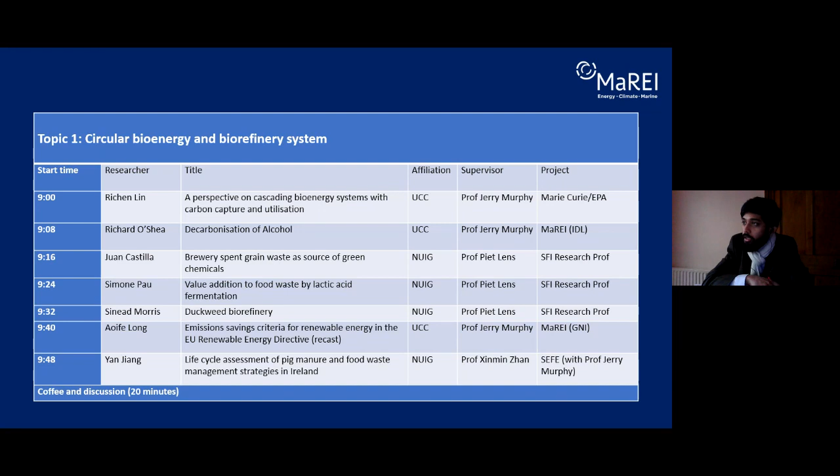Thank you, Jerry, for asking me to be the chair and giving me the opportunity to chair this first session of the MaREI Biofuel Symposium. So without any delay, I would like to start our session on circular bioenergy, and what we will do with our first presenter, Richen Lin, is look at a broader perspective on bioenergy systems, which looks at cascading bioenergy systems with carbon capture and utilization. So over to you, Richen, for your first presentation.

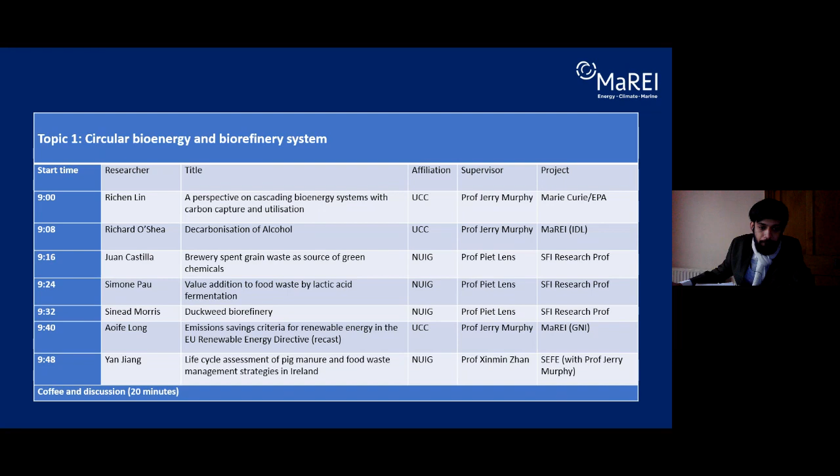Yeah, thank you very much, Archie, for your introduction. I'm very delighted here today to present my research on the cascading bioenergy system with carbon capture and utilization. So that's the topic. If you go to the next slide.

And here in this slide, it shows the opportunities of anaerobic digestion-centered carbon capture and utilization technologies, with a short term of ADCCU. There are many different technologies in the renewable energy area, such as wind and solar from the marine sector, and also power to gas for renewable hydrogen production, bioelectrochemical systems for CO2 reduction and fixation. We also have technologies, anaerobic digestion, biomethanation for biogas and biomethane production.

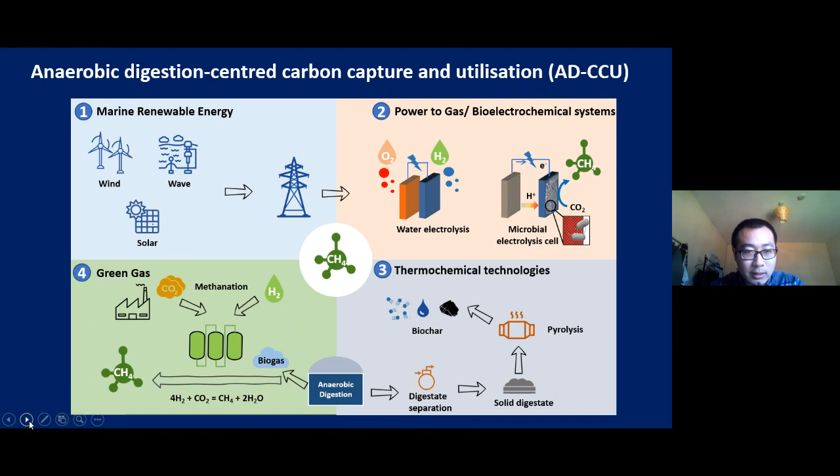There are also thermochemical technologies such as pyrolysis and gasification for the valorization of solid digestate for biochar production. And among the different technologies, anaerobic digestion offers a very compatible platform so that many other technologies can be integrated with this. However, moving on to the next slide, with so many individual technologies and options, we want to ask how these technologies can be best integrated to maximize their potential, especially in terms of the energy output and sustainability. Moving on to the next slide.

Trying to answer this question here, we propose 3 anaerobic digestion-based bioenergy systems. Up top, that's the conventional anaerobic digestion with amine scrubbing for biogas upgrading. In the middle, you can see it's the anaerobic digestion and power to gas based biomethanation. Down below is the third system, anaerobic digestion with microbial electrolysis cell for biomethanation. Systems 2 and 3 both include the pyrolysis of solid digestate for biochar production in the cascading circular concepts.

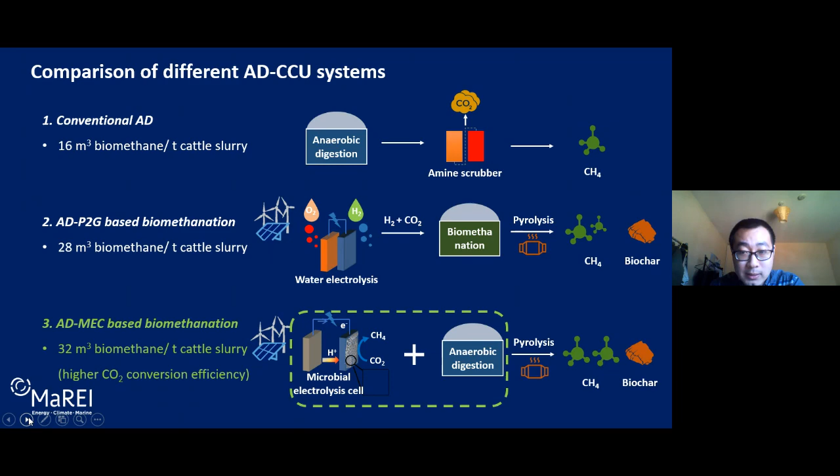So by doing the mass balance of different systems, it allows us to track the specific flow of each component from input feedstock, for example, cattle slurry, to the final products in the form of biomethane, syngas, bio-oil, and biochar. And here I didn't include the details for calculation. But what we found is that anaerobic digestion with microbial electrolysis cell has the highest biomethane yield due to the highest CO2 conversion efficiency and the highest feedstock biodegradability. And the ADMEC system almost doubles the methane yield as compared to the base case. Next slide, please.

And based on the mass balance calculation, we can then calculate the net energy yields and greenhouse gas emissions of different systems under different scenarios. And here we assess the three scenarios in terms of the energy supply to power to gas and microbial electrolysis cell. The first scenario is to use the curtailed or constrained electricity for power to gas and microbial electrolysis cell. The second scenario is to use renewable electricity, and the third scenario is to use grid electricity.

And due to the fact that each scenario has a very different primary energy factor, in other words, energy efficiency, the results are very different. For example, if using grid electricity, both power to gas and MEC cannot produce enough energy to offset the energy inputs. That is to say, the system performance depends absolutely on the source of electricity.

And the potential for greenhouse gas emission savings comes from three sources, as indicated on the right side of the slide. The first source is the biomethane production to replace diesel. The second is the avoided fugitive greenhouse gas emissions from cattle slurry if it's used as feedstock. And the third is the CO2 sequestration by biochar.

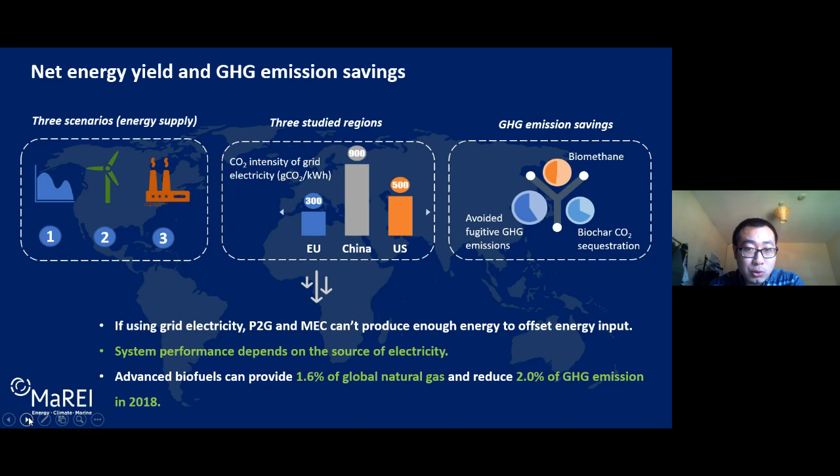In addition to the desktop study, we've also looked at experimental studies on the topic of integrating anaerobic digestion and pyrolysis with the use of biochar in digestion to promote direct interspecies electron transfer. We published a few papers on this topic, and generally we found that the optimal system can increase biomethane yield by around 20%, and it can also reduce digestate amount by a level of 25%. And we also conclude that biochar can achieve comparable performance to the high-cost nanomaterial graphene as a proof of concept material.

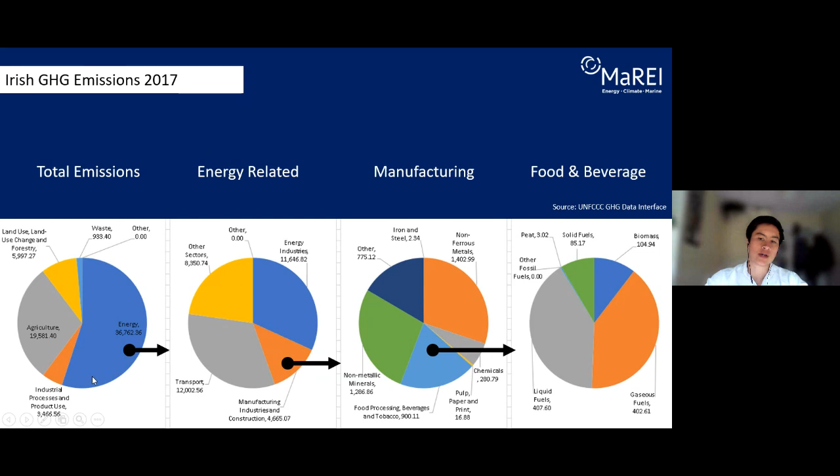So one of the ways that you can produce renewable thermal energy in the food and beverage sector is through the use of anaerobic digestion. So looking at a large distillery in Ireland, you can see that it consumes about 254 gigawatt hours of natural gas, which is a significant amount of energy.

The byproducts of whiskey production consist of draff, thick stillage, and thin stillage. These are residues of the brewing and distillation process following the processing of malted barley, unmalted barley, and maize. Currently, these byproducts are converted into animal feed, dubbed moist grains, dry distillers grains, and syrup. However, it is possible to convert these byproducts, draff, thick, and thin, into biogas.

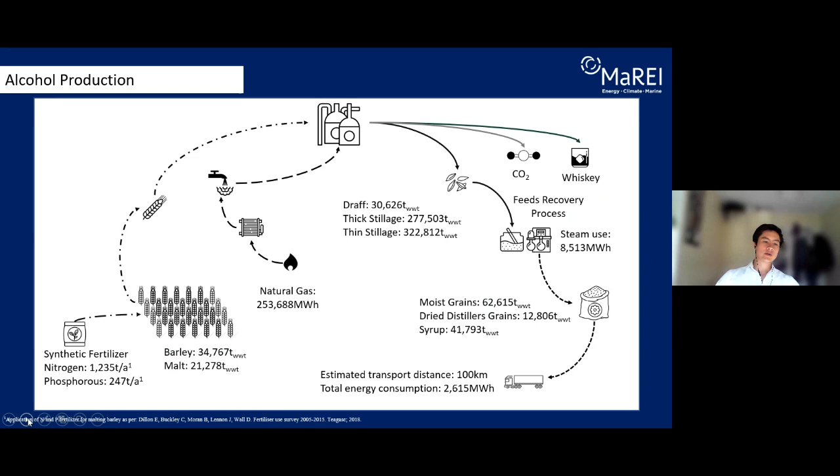On the next slide, you'll be able to see that using these byproducts in an anaerobic digester, the biogas can be consumed on site in a boiler to produce steam, and this steam then can be used in the distillery operation. The idea is that the biogas would replace natural gas. This would reduce carbon dioxide emissions from the distillery in terms of its Scope 1 greenhouse gas emissions, and it would also reduce the greenhouse gas emissions under the emission trading scheme.

If you were to digest all of the byproducts available at the distillery, you could offset about 61% of the current natural gas demand of the plant. When you digest your byproducts, you no longer produce animal feed, so your energy consumption at the distillery actually reduces. As such, you could replace about 64% of that reduced energy consumption.

The majority of the biogas comes from thick stillage. So thick stillage is analogous to whole stillage from the production of corn or maize ethanol. Following this, thin stillage, the residues from pot distillation, and draff, the residue from barley brewing, can supply the next largest share of biogas.

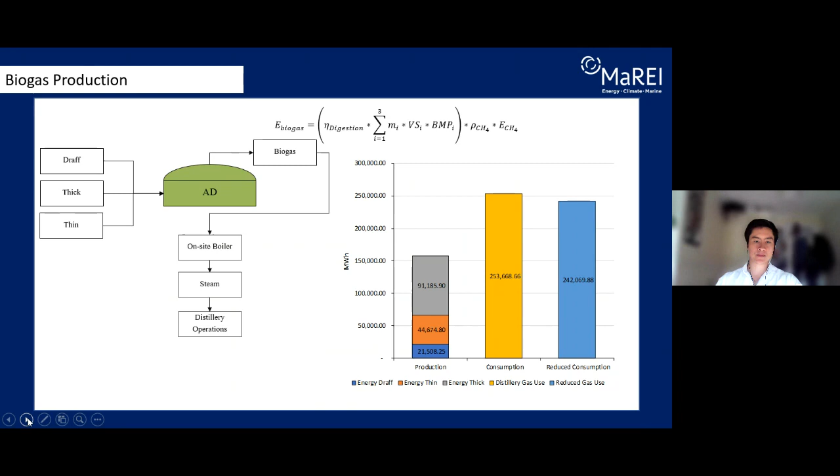As well as this, on the next slide, you'll see that when you use draff, thick and thin, or any other food processing byproduct, you can produce digestate, a mixture of solid and liquids left over after the anaerobic digestion process. And this mixture contains phosphorus and nitrogen, as well as other nutrients that can be used as fertilizer to replace synthetic fertilizers applied to land.

So knowing how much digestate is produced from your anaerobic digester, knowing the nitrogen content and the phosphorus content, you can work out what land bank is required to spread this digestate on, knowing how much nitrogen and phosphorus can be spread on each individual parcel of land. So you can quantify how much fertilizer you could replace, how much greenhouse gas emission savings you could enable by replacing that fertilizer, and also you can get a handle on, well, how big is the land bank?

How many kilometers do I have to drive in order to spread this digestate? Because that is a key issue in terms of public acceptance of AD plants, specifically road traffic movements.

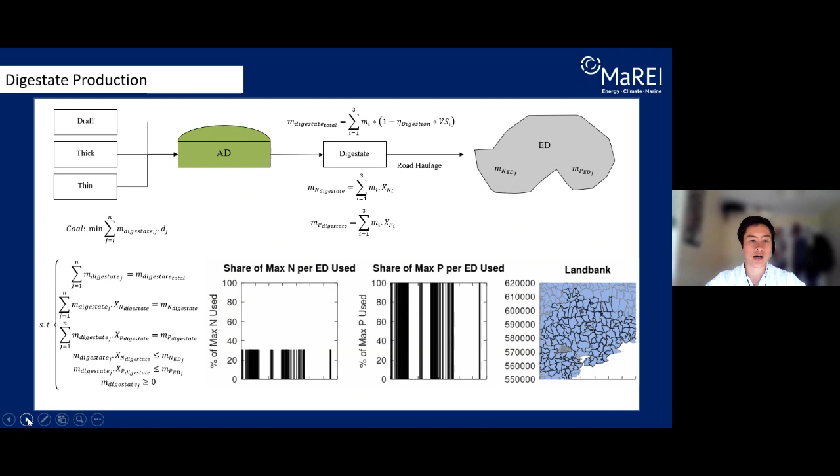On the next slide, you'll also see that when you stop producing animal feed, it may be, in a worst case scenario, required to import some animal feed to replace what you would have produced. So looking at the amount of animal feed imported into Ireland and the various types, I was able to create an optimization model to figure out what would be the most likely imported feeds to replace the feed that would be produced if you use distillery byproducts in an AD plant.

And it's primarily distillers grains from the USA and soybean meal from Argentina. The total national increase is only about 5% and 2% respectively of the total mass of each imported feed in 2018.

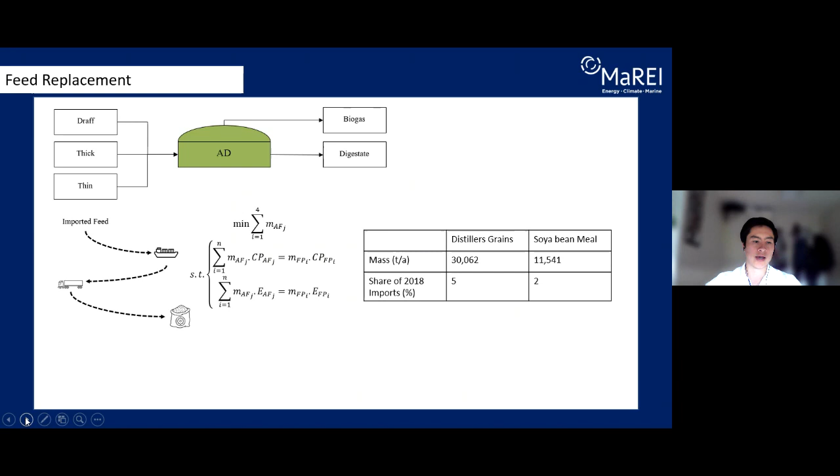And finally, summing it all together, it is possible then to create a greenhouse gas balance, for example, where you can look at the emission savings associated with replacing natural gas by biogas, dubbed your Scope 1 greenhouse gas emission savings, as using digestate on agricultural land for the cultivation of barley or cereal consumed within a distillery can also reduce your Scope 3 greenhouse gas emissions.

Importing and producing animal feed may result in the emission of greenhouse gases. So these would negate some of the emission savings that you would achieve through the implementation of an AD plant. Summing all of these together, you could get a total greenhouse gas emission saving of about 5,000 tons of carbon dioxide equivalent.

However, this leads to another question as to, well, which one of these criteria is relevant to a company in the food and beverage sector? Is Scope 1 emissions the only thing that people care about? Do Scope 3 emissions also come into the equation? And should companies be concerned about the emissions associated with animal feed, which are outside of their supply chains, over which they have no control?

Depending on your parameters and your criteria that you choose to select a project, it may be possible to actually use a portion of each byproduct in order to achieve an overall optimum or a trade-off between maximizing your Scope 1 savings, your Scope 3 savings, and possibly minimizing the emissions associated with importing animal feed. So this kind of analysis can be done for other large players in the food and beverage sector in Ireland in order to aid further decarbonisation of this industry.

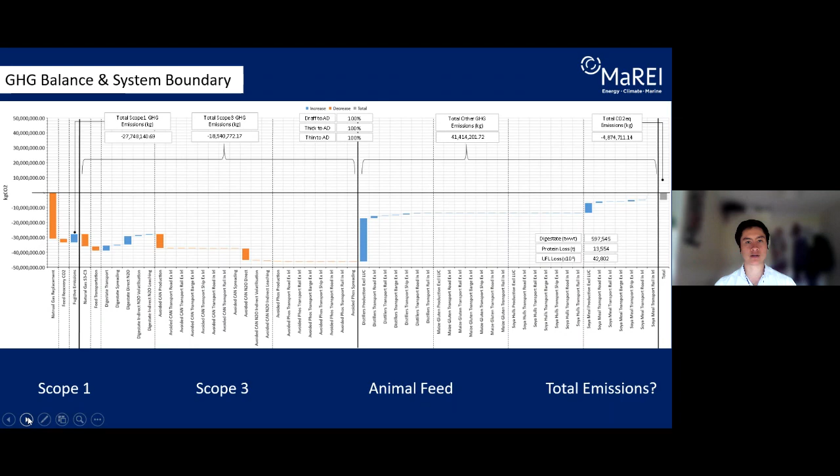A very interesting talk. For the next presentation, we will continue with brewery wastes as a source of green chemicals, and it will be presented by Juan Castilla from NUIG. Juan, the floor is yours.

Thank you so much for the introduction. I don't know if you can see the presentation or not. We can see the presentation, Juan. We can roll. Okay, perfect. Thanks so much for the presentation.

Currently I'm doing the PhD with Professor Piet, but I was working previously for a couple of years here in Ireland. And with Professor Piet, we designed these experiments. The idea was using brewery spent grain for production of green chemicals. In the next slides, we can see the reasons we chose brewery spent grain. We started to do a screening of the different products that we could try to use for industry, and we decided to go with brewery spent grain because this is a low-cost biomass, it's the most abundant side stream, and because it's from the brewery's process, the composition is quite constant throughout the year.

As well, between 15 to 20 kilograms of BSG is produced per hectoliter of beer, and just in Ireland last year, more than 8 million hectoliters was produced. So the total amount produced was between 120 to 160,000 tons. And the typical composition of the brewery spent grain is around 50% carbohydrate, lignin around 20 to 26%, protein 20 to 30%, which is quite good. So what we wanted to produce was volatile fatty acids that can replace the fossil sources, and Ireland depends currently on the import of those products.

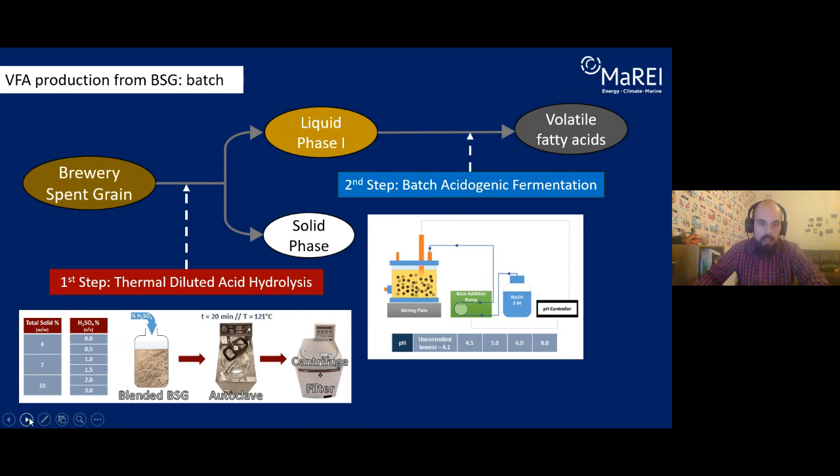From uncontrolled pH, 4.5, 5, 6, and pH 8. So the results from this experiment, in the next slide, were that the best hydrolysis was using 1.5% of sulfuric acid and 7% of total solids. With this concentration, we obtained around 33 grams per liter of total carbohydrate. That means 0.44 grams of total carbohydrate per gram of total solids used.

As well, with the different pH that we used, we obtained at pH 6 the highest concentration of volatile fatty acids in terms of grams of COD, approximately around 20 grams per liter. So the acidification level, which means the contribution of these volatile fatty acids to the overall soluble COD, was 93%. So now that we demonstrated the feasibility of volatile fatty acid production from brewer's spent grain, the next step was the development of the continuous process.

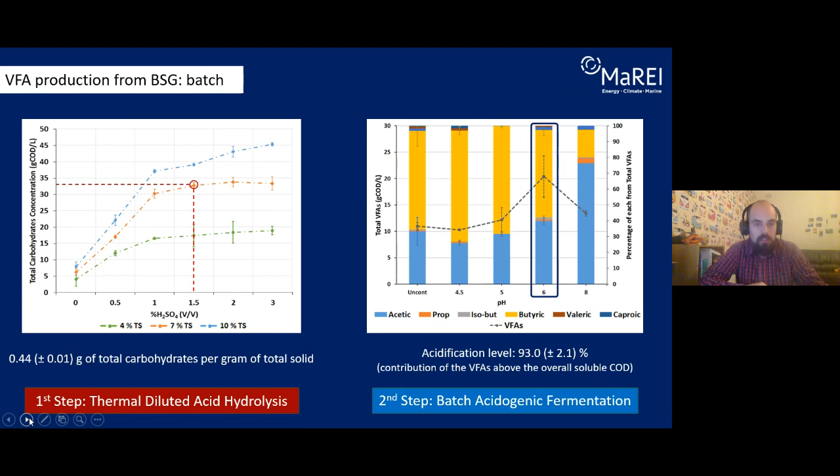We changed a little bit this two-step process by adding some substeps. So in the next slides, we can see we have the spent grain, we have the hydrolysis process as well, but now what we did was take the solids and wash them with distilled water. We used the same amount of water that we recovered in the liquid. Once again, we filter, recover this liquid, and join the two liquid fractions.

So in the first liquid fraction, we obtained around 33 grams. In the next liquid fraction, we obtained around 5-6 grams of total carbohydrates per liter. So this means that we increased the yield of carbohydrates from 0.44 to 0.49 just by washing. What we did next was take this mixture of liquids from the hydrolysis and neutralize it, because the pH was around 1 at this point. So we neutralized it to pH 6 to use pH 6 in the continuous process.

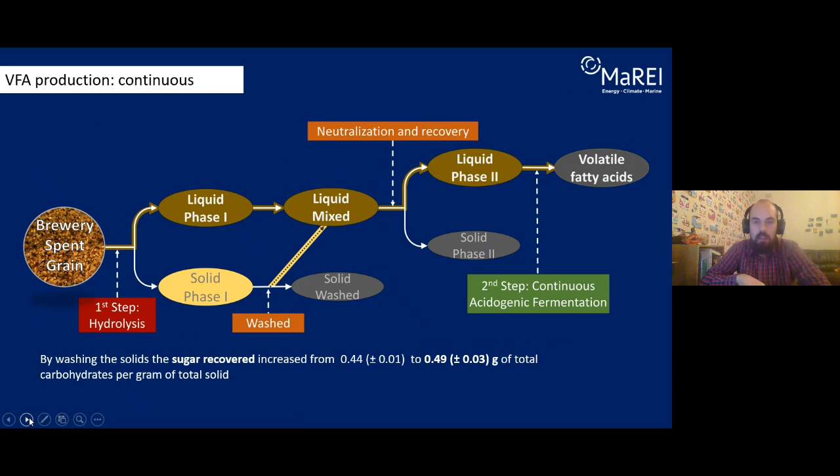In that neutralization, we had some precipitation, and we removed this precipitate and used the liquid for a continuous acidogenic fermentation. So in the next slides is the system that we used. It was an expanded granular sludge bed reactor. Mainly this trial was divided into 5 phases based on the hydraulic retention time. The inlet concentration we were feeding was 15 grams per liter. So that means that the organic loading rate was from 10 to 15, 20, and 30 grams per liter per day.

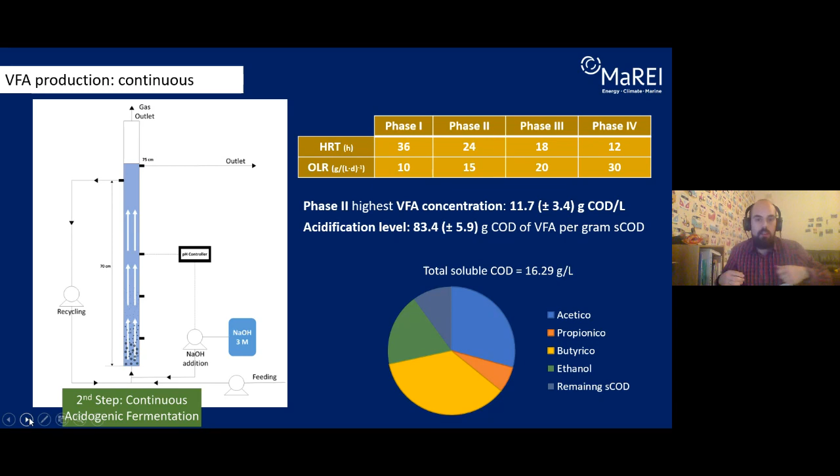So the best volatile fatty acid production was in phase 2, when we obtained a total soluble COD in the outlet of 16.29 grams per liter. The volatile fatty acid concentration in that case was 11.7, so this is an acidification level of around 83.4%. The major compounds in that phase were acetic acid, butyric acid, propionic acid, and there was also a higher production of ethanol, whereas we had no production of ethanol in the batch reactor, and a small fraction of soluble COD that was not recognized. So, going to the next slide, this was the previous process.

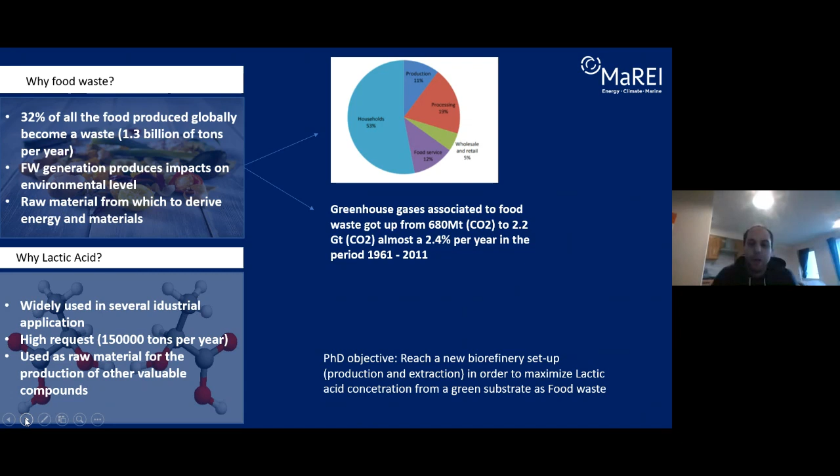and in the chemical. So the research objective of my PhD is to reach a new biorefinery setup in order to maximize the lactic acid concentration from a green substrate such as food waste. Next. So to do so, I started with the batch test. I tried to compare different inocula in three conditions.

The first was a comparison between two different pH. The first was pH 7 using a phosphate buffer, and the other one was an uncontrolled pH. And the third condition was a thermal pretreatment of the food waste. The food waste that I used was synthetic. I took the composition from the literature, and I created it in order to replicate the composition of a restaurant food waste.

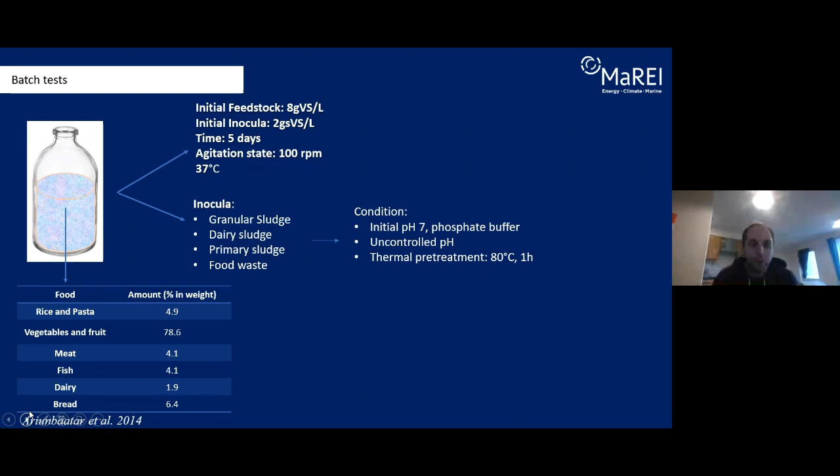I will not... first, if you can go to the next slide, I can show the first sludge, which is the primary sludge. This is an anaerobic sludge. From this graph, we can see mainly two things. The first is that acidogenesis starts after 24 hours with a complete degradation of the sugars, and that the lactic acid was produced just in the pretreated case. That was the only one that reached a pH below 4.

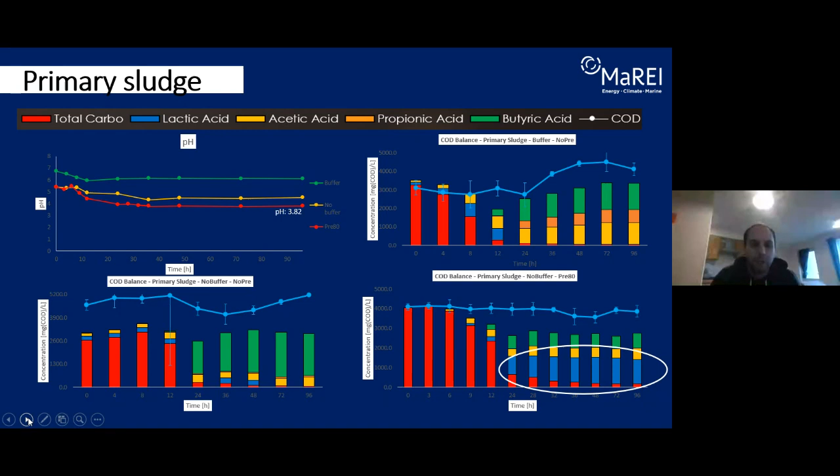A net of VFA, mainly butyric acid and acetic. This is confirmed in the next slide. This was a control with just the food waste with no inocula. As you can see, in the last two cases, we have a net accumulation of lactic acid, and also in this case, we had a pH that was lower than... In the case with the buffer, we have no lactic acid accumulation.

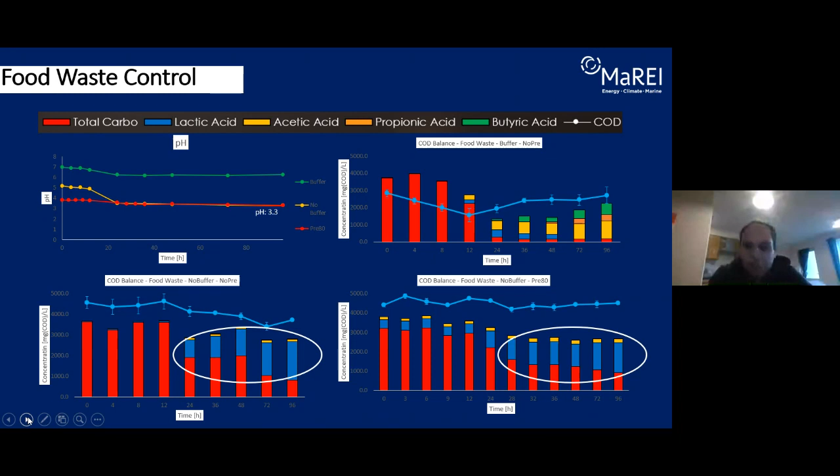The food waste alone showed the best lactic acid production, and among the sludge, the primary sludge resulted the only one that shows accumulation of lactic acid for all the experimental time. And then we can say that the best range of pH for a good lactic acid production is between 3.8 and 4. I want to say how my PhD will be carried on.

I set up two UASB reactors in order to investigate the key parameters, so to push as best as I can the OLR and reduce the HRT in order to have the maximum lactic acid production in the minimum time, and then set up a membrane extraction mode to try to improve the actual methods for extraction in the lactic acid industry.

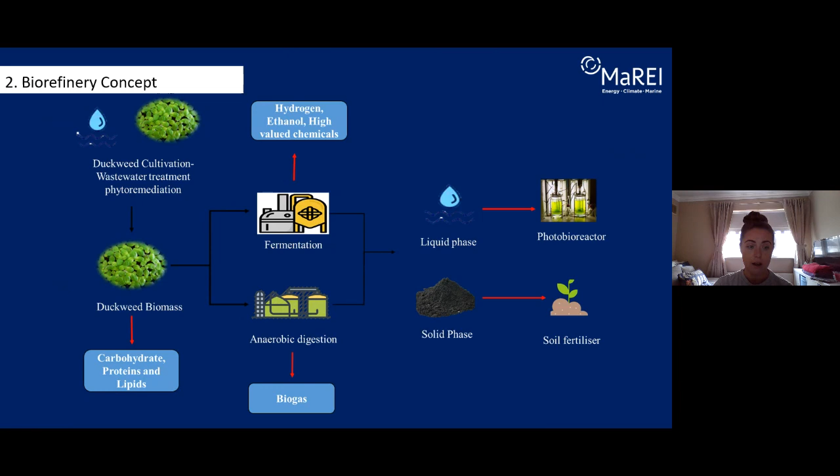So to begin with, what is phytoremediation? Phytoremediation is using green plants and associated microorganisms to uptake chemicals or toxic environmental contaminants from the soil or from the water. Other researchers have shown that duckweed is capable of remediating different types of wastewaters, and specifically some researchers have looked at Lemna gibba, which has shown the potential to remediate chromium and cadmium with removal rates of 98 and 94%, while the species Lemna minor has shown a 30% removal rate for chloride.

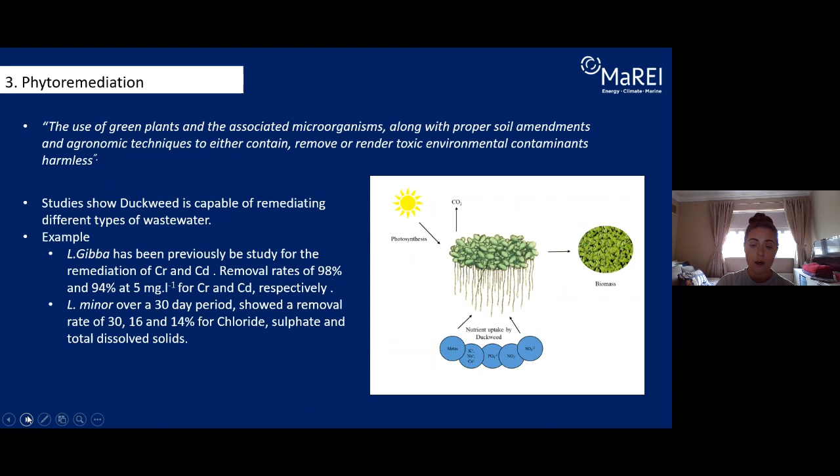So using duckweed's phytoremediating capabilities, we can then harvest a biomass. If we go on to the next slide, please. When we harvest a biomass, we can use it in two different processes, for biogas or biofuels. If we look at the gas process, producing biogas using anaerobic digestion or by fermentation is considered a green technology. Primarily researchers have been focusing on using duckweed in AD for methane production, with very few studies focusing on dark fermentation for hydrogen.

So the questions we want to ask: is it possible to use duckweed in large-scale hydrogen production, and what yields could be expected? Moving away from biogases to biofuels in a liquid process, some studies have indicated the potential to use duckweed in an ABE cycle for ethanol and butanol production. Like biogas, what yields can be achieved and how successful can it be? We know that ethanol fermentation plants produce massive quantities of carbon dioxide, so would it be possible, if we use duckweed in this manner, to capture the carbon? Some additional studies have also used duckweed in fermentation for the production of high-valued chemicals such as succinic acid. So can duckweed be used to produce other high-valued chemicals?

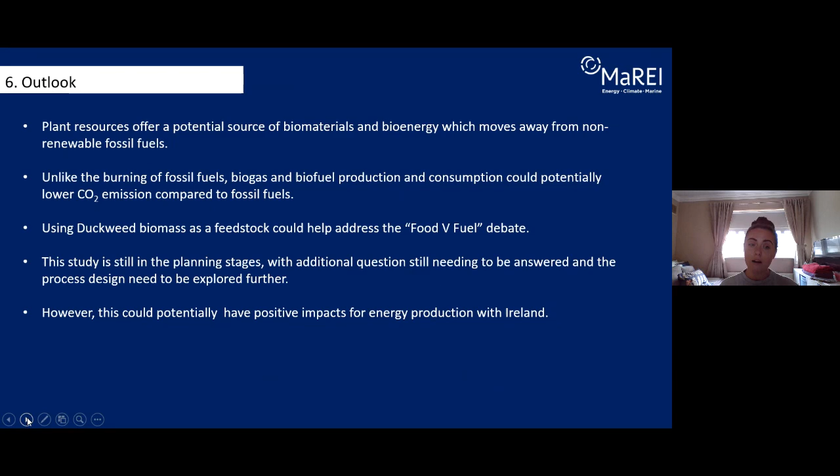So we can produce biofuels and all other chemicals, but we do need to make sure that these stick to the actual policy documents and what is recommended by the law of the land. So our next presentation by Aoife Long is going to discuss the EU Renewable Energy Directive recast and tell us what emission savings must be achieved by these biofuels and other chemicals. Over to you, Aoife.

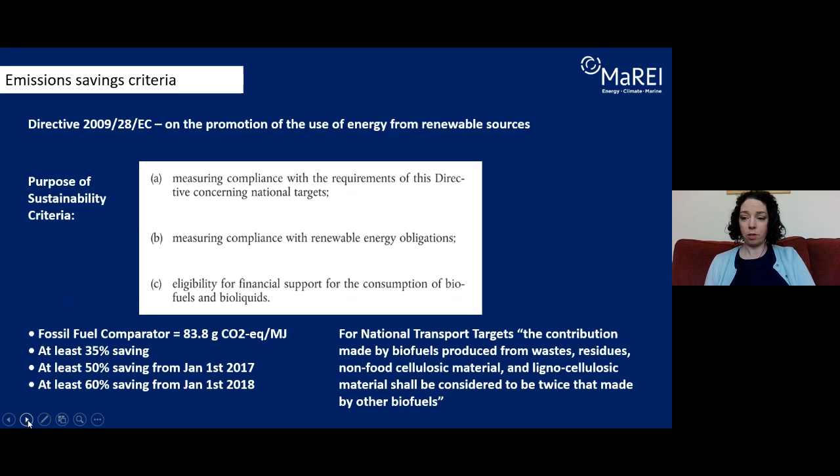So the fossil fuel comparator is what you're measuring your CO2 emissions for the pathway against. And in the original directive, that was set as the emissions from the pathway for diesel, which is roughly 83.8 grams CO2 per megajoule. The saving required increased as the directive went on. So when it was first introduced, the saving required was 35%, and then this increased over time.

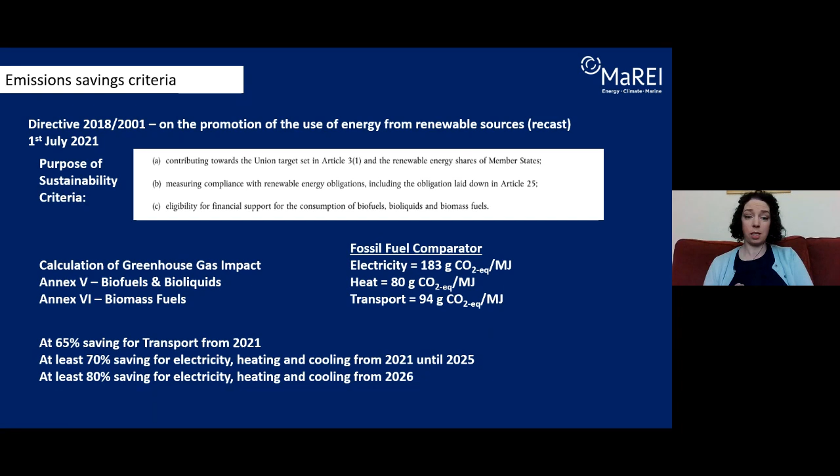So could we go on to the next slide, please?

Thank you. So what all of this means is that when you have different fossil fuel comparators, taking the conversion efficiency into account and the emission savings, the emissions that you are allowed for heat are the lowest, electricity is a little bit higher, and then you're allowed much higher emissions when you're using your biofuel pathway as a transport fuel. So what the directive does essentially is that it uses the rules to almost direct the end use of your gas towards transport, rather than saying explicitly you must use a particular biofuel for transport.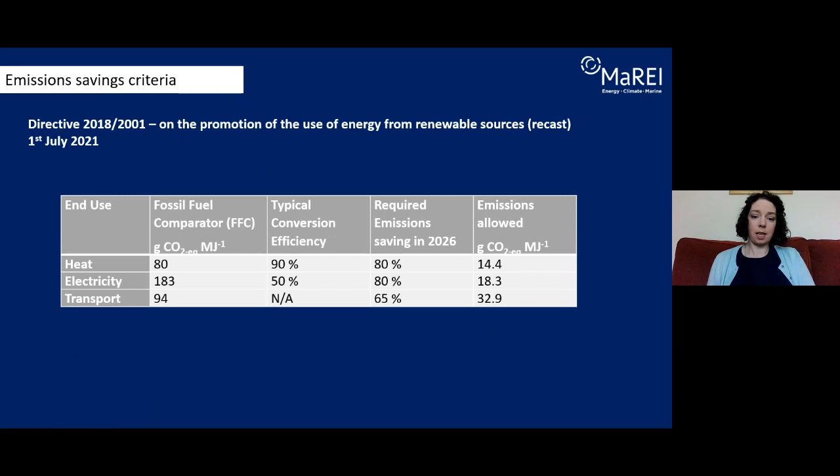And the transport emission saving will meet the lower criteria of 65%, whereas the 70% emission saving for heat will not meet the 80% emission savings criteria. So this becomes very important for countries to decide how they are going to use their renewable gas resource. So the next question I was asking was, is it possible to meet the emission savings criteria for heat using a resource potentially available in Ireland?

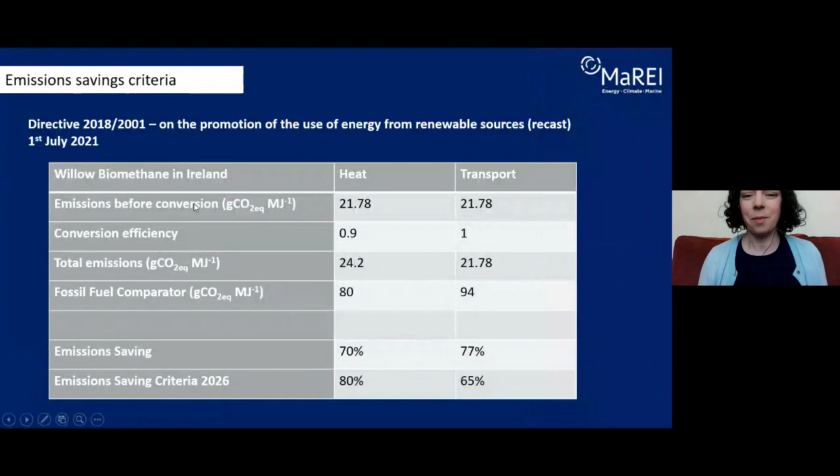So if you could go to the next slide, please. So looking at willow biomethane, this is a similar pathway. Can you just go back one slide, please? Thank you. So the emissions before conversion are going to be the same on either side, and then taking into account the conversion efficiency. Sorry, that was my own timer.

So the conversion efficiency leads to higher total emissions, a lower fossil fuel comparator for heat, and different emission savings required mean that you can use the fuel for transport and not for heat. So again, it's very important to consider the emission savings along the pathway and how the directive will influence the end use of the gas in different countries. Thank you very much.

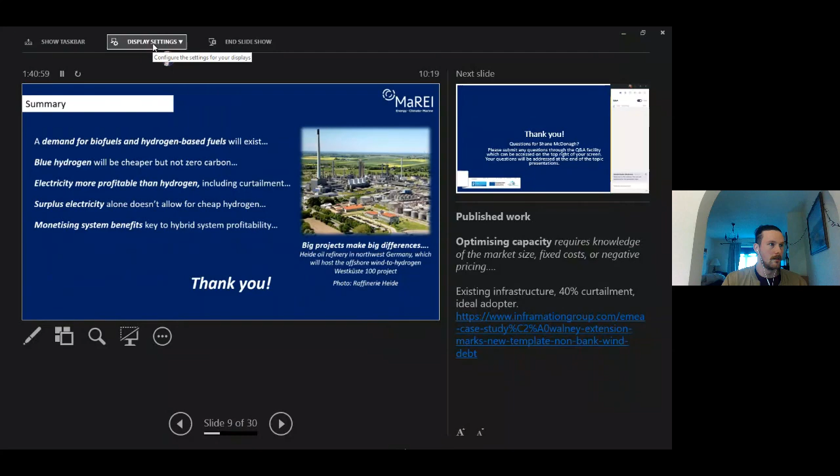Oh, sorry, Tara. Is that you? There you go.

Thank you. Electricity is more profitable than hydrogen, even including for high levels of curtailment. So in order to produce hydrogen, we have to think of different business models. And surplus electricity alone doesn't allow for cheap hydrogen. And then finally, monetizing the system benefits is key to hybrid system profitability. You can check out these insights in a paper I wrote, which was linked in one of the previous slides.

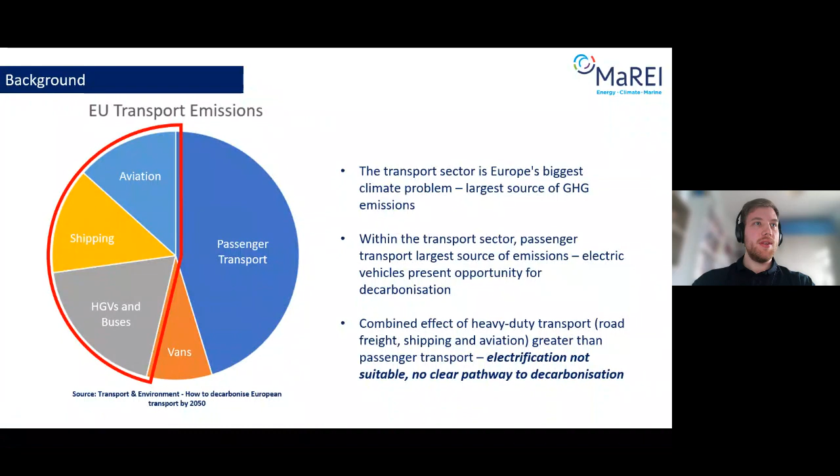So as Shane noted in his presentation, there are a number of ways to produce hydrogen, each with their own pros and cons. Once the hydrogen has been produced, there are a range of different utilization pathways within the heavy-duty transport sector, with each sector having its own specific requirements for alternative fuels.

The most basic utilization pathway for hydrogen is to compress it to around 700 bar and use it to power fuel cell electric vehicles. Fuel cell electric vehicles are an option for the road haulage and short sea shipping sectors, with companies such as Nikola developing hydrogen-powered heavy goods vehicles, and the Golden Gate Zero Emissions Project set to launch the world's first hydrogen-powered ferry in San Francisco.

However, use of hydrogen fuel cells in the aviation sector is unlikely to become a viable option until at least 2050. One thing to consider is that in order to prevent fuel cell degradation, very high purity hydrogen is required. And while the fossil fuel reforming process produces a relatively pure stream of hydrogen, some impurities will remain, meaning its use in fuel cell applications could be limited.

However, although compressed hydrogen is more energy dense than batteries, its onboard storage can be bulky and expensive, and it is not applicable to some sectors such as the deep sea shipping and the aviation sector, which are reliant on energy-dense liquid fuels due to the nature of their journeys and refueling patterns.

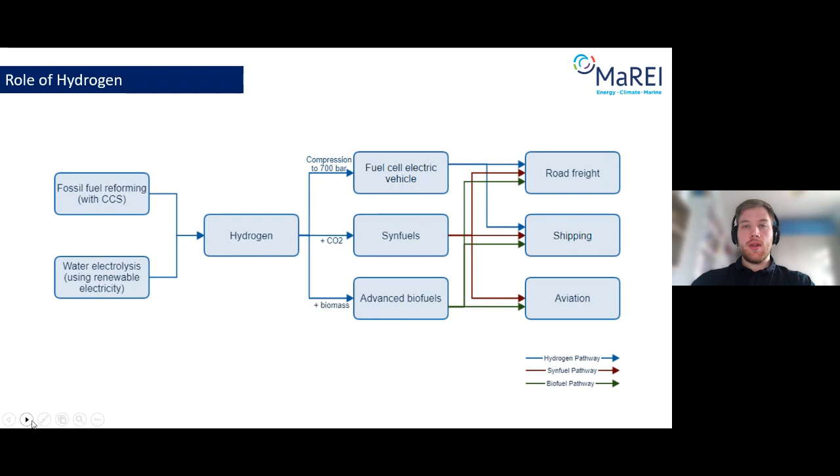Again, as highlighted by Shane in his presentation, only using otherwise curtailed or wasted renewable electricity to produce hydrogen results in prohibitively high levelized costs, meaning economies of scale are required to minimize the cost of hydrogen, typically with electrolysis capacities of around 10 megawatts and above. This is particularly relevant to the production of synthetic fuels, especially liquid fuels, where the extra processing steps involved also require economies of scale to be viable.

However, due to the extra cost and complexity associated with their production, hydrogen-based synthetic fuels will always be more expensive to produce than the hydrogen itself, meaning that from an economic point of view, it makes sense to use the hydrogen directly wherever possible. Research has shown that the carbon intensity of hydrogen produced electrolytically is almost entirely associated with the carbon intensity of the electricity used in the electrolysis process.

Again, while only using renewable electricity to make hydrogen results in very low greenhouse gas emissions, it also results in very high levelized costs. Therefore, to reduce the cost of hydrogen, interaction with the electricity grid is required, which can result in the hydrogen having a large carbon intensity. However, using a wind forecast prediction tool that only turns on the electrolyzers when wind levels are predicted to be high has been shown to reduce the carbon intensity of the hydrogen by up to 47% compared to the grid average.

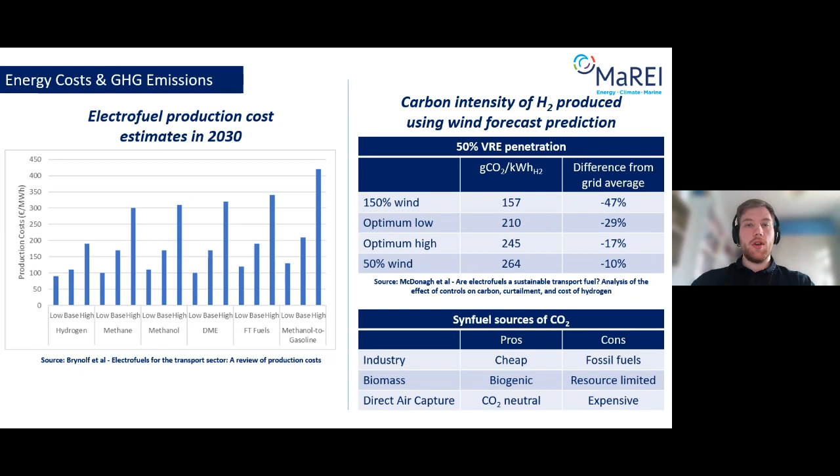The well-to-wheel efficiency of the entire system is another important factor that has to be considered. In a vacuum, it is clear that in the example given above for road freight, using hydrogen directly in fuel cell heavy goods vehicles offers superior system efficiencies when compared with the power-to-gas and power-to-liquid pathways. However, there are other factors which need to be considered.

For example, the power-to-gas pathway offers the potential for combination with biomethane as a transport fuel, while the power-to-liquid pathway allows for use of existing infrastructure while also offering a pathway to decarbonize modes of transport reliant on energy-dense liquid fuels such as the aviation sector. It is important to note that there is no one single silver bullet solution that is applicable to all modes of heavy-duty transport, with each different fuel production pathway having its own specific niches and applications.

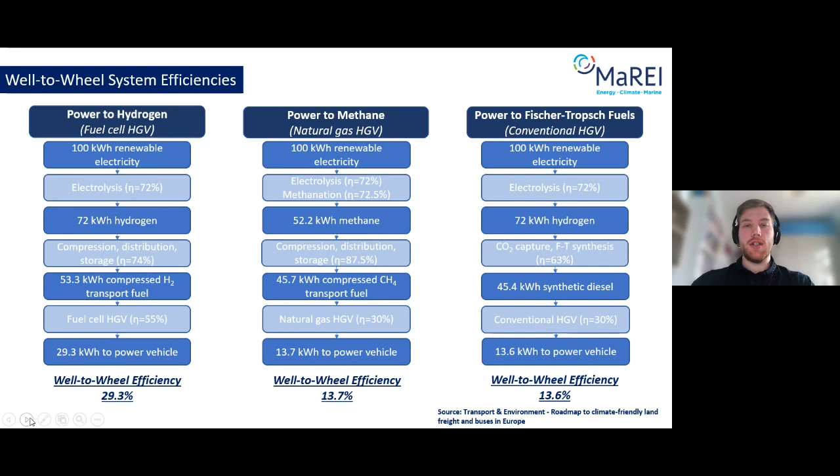And now moving on to the final slide, just to finish up with some perspectives and conclusions. It's clear that economies of scale are required to make electrofuel production viable at large scales, and this is typically around 10 megawatts of electrolyzer capacity and above. And I would suggest using hydrogen directly in fuel cell vehicles where possible, due to economic and system efficiency benefits, while reserving the use of synthetic fuels for sectors where there are no alternatives, such as deep sea shipping and the aviation sector. Thank you for listening.

Thanks, Nathan. It was indeed an interesting presentation. So our final presentation on hydrogen economy looks in more detail at using hydrogen, and that presentation will be given by Davis Rusmanis from UCC. So Davis, the floor is yours.

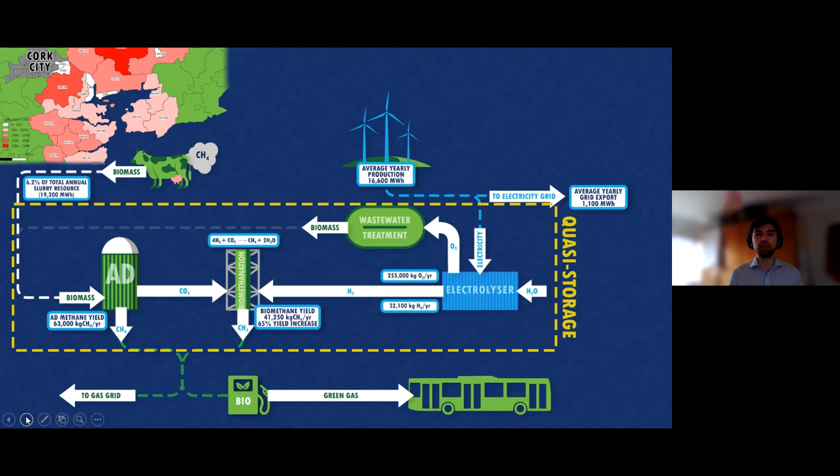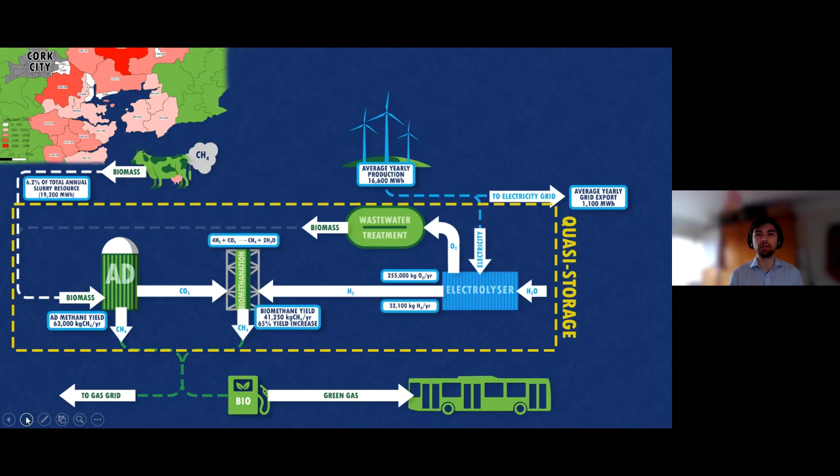an effective quasi-storage method. Research by Shane McDonough has shown that for production of non-hydrogen electrofuels, production would require to be over 10 megawatts to be viable. However, by pairing waste electricity generated hydrogen with biogas upgrading, oxygen byproduct use for wastewater treatment, and secondary incomes from grid services and other cost savings, the system becomes viable in small scale. Next slide.

As part of my previous work, my first paper was a review of the state-of-the-art of biological hydrogen methanation, or BHM for short. The paper compared the existing systems in literature, focusing on the system performance which follows the Sabatier reaction. In addition, I sought to accumulate the available data on gas-to-liquid mass transfer rates, which are shown to be a key aspect in the optimization of BHM systems.

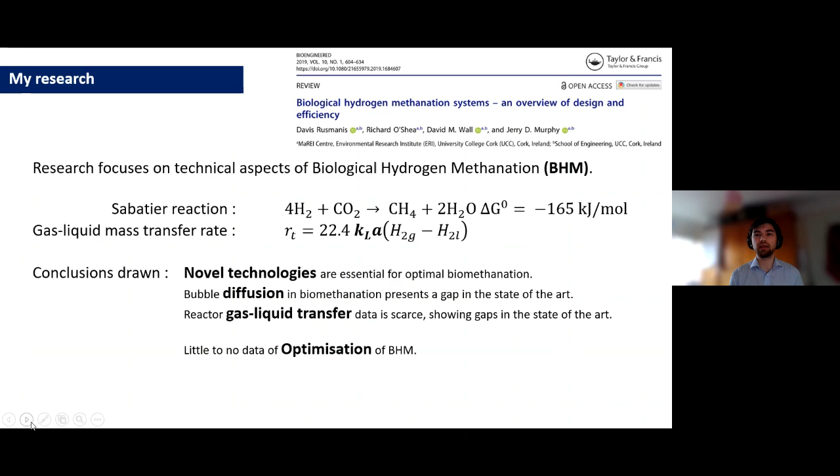Some of the conclusions drawn from this research paper highlight that the mature technologies, such as CSTR systems, may not be optimal for BHM. Rather, an exploration of novel systems is essential. In addition, bubble diffusion presents a gap in the state-of-the-art, where it could play a key role in the bottleneck that is dissolution of hydrogen gas into liquids. Finally, the literature lacks gas-to-liquid transfer data, calling for exploration of this system parameter that is required for optimization of the process.

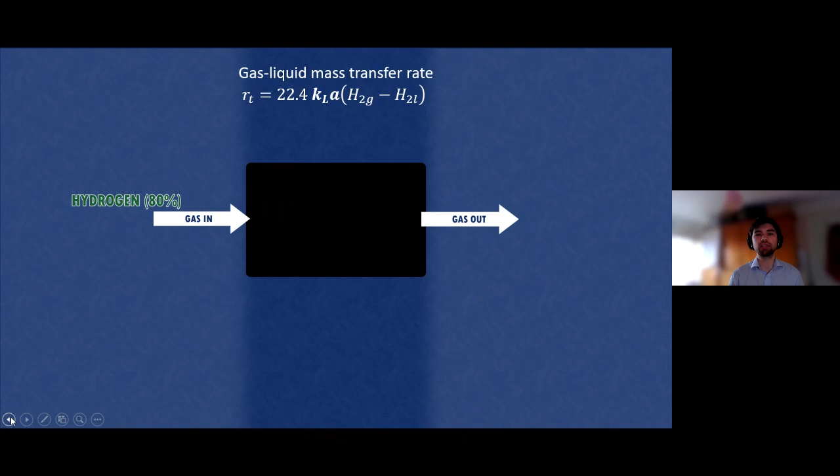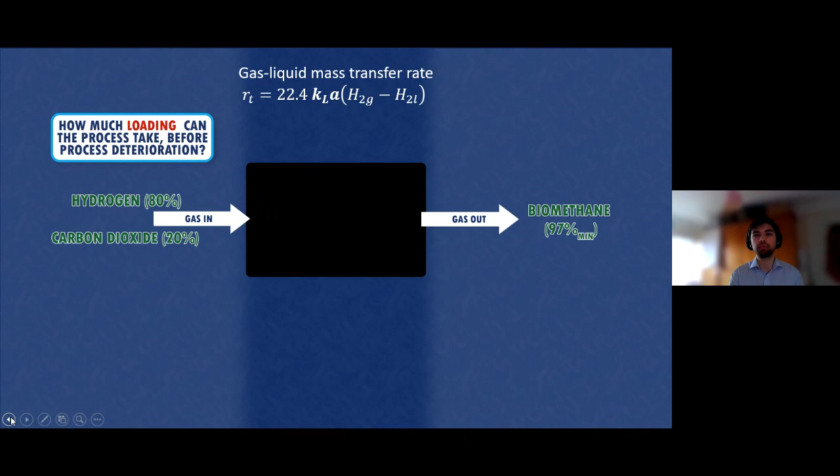To give a quick overview of the BHM system optimization, we'll treat this black box as a reactor where our resource gas, hydrogen and CO2, goes in and our desired gas, biomethane, leaves. In order to optimize the system, we look at the three main parameters. First, how much loading can the system take before the process deteriorates and we begin to fall short of our desired outcome, which is grid injection quality biomethane.

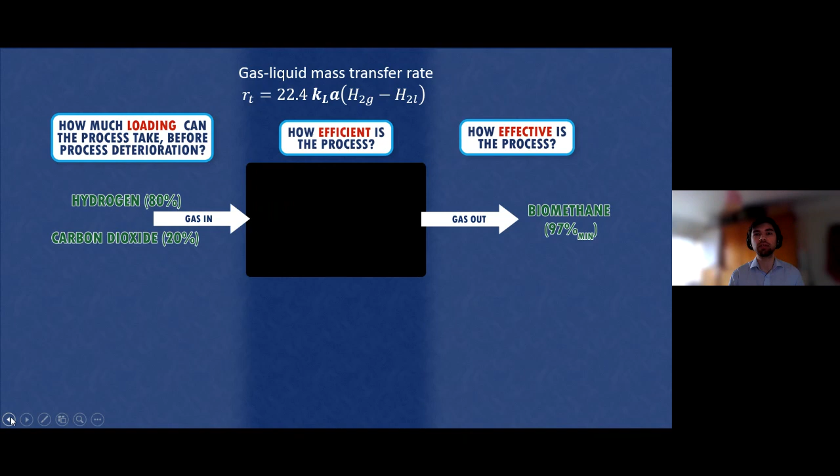Second, how efficient is the process? We want to ensure that the upgrading is as fast as possible. And third, how effective is the process in producing our desired outcome, clean biomethane? These three parameters in our system are represented in the form of methane evolution rate, or MER, which tells us how many volumes of biomethane can be produced per volume of reactor liquid.

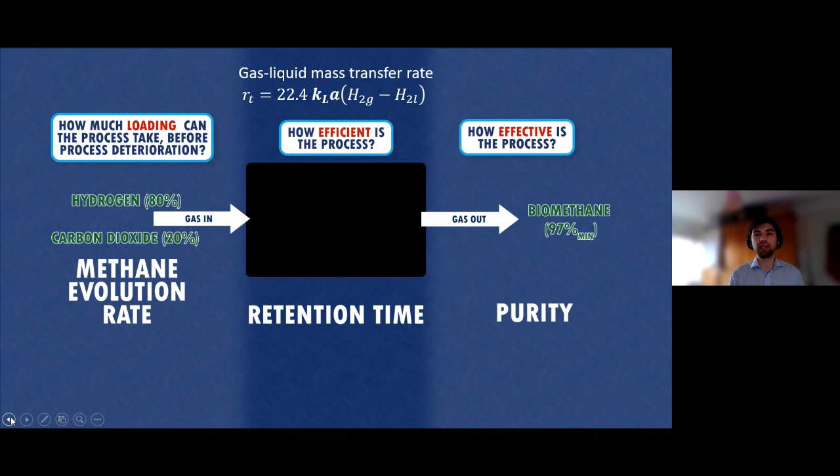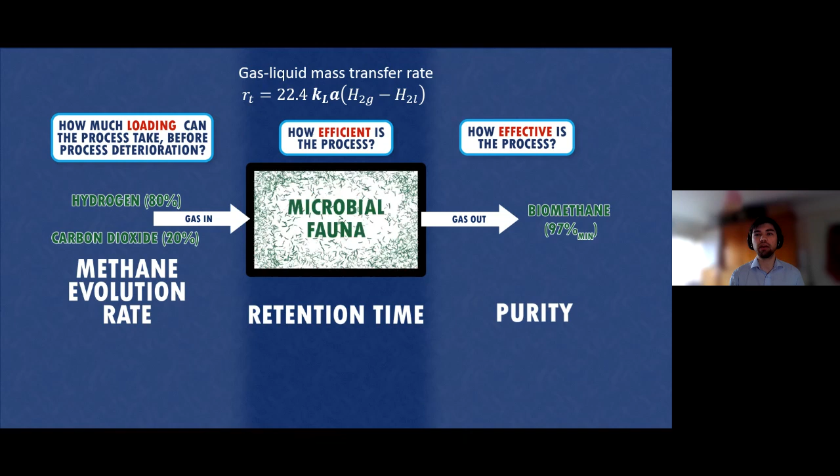The retention time dictates how long the gas resides within the system, and finally the purity, which shows how clean the product gas is when exiting the process. And these three parameters can be improved by altering the reactor environments, which can be done through pressure, temperature, microbial fauna, and hydrogen dissolution, among others. And this overall system can then be evaluated in its ability to dissolve hydrogen by analyzing the gas to liquid transfer rates. Next slide.

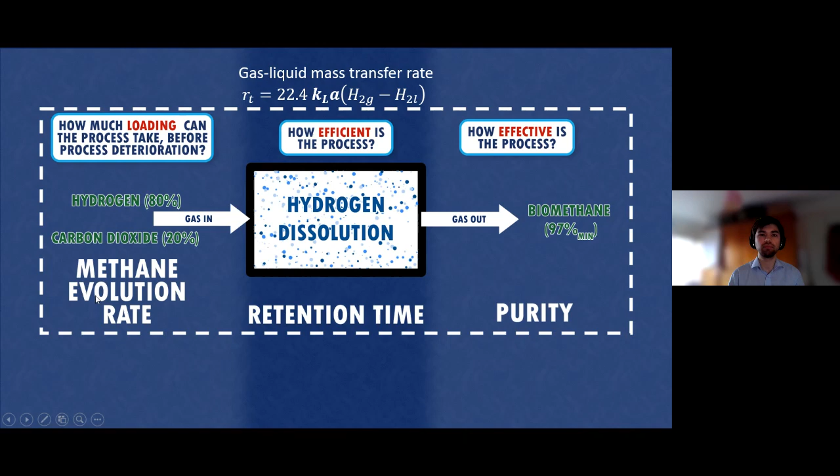However, a project by Electrochaea, based in Denmark, appears to have had success in optimizing a BHM demonstration plant, achieving high loading at efficient and effective rates. This can be attributed to their high pressure, thermophilic temperatures, patented microbe strains, and rapid mixing rates, allowing for an extremely efficient process. Next slide.

Coming back to our group, with knowledge gained from this research, we've been working with engineering companies to design and build a state-of-the-art BHM rig. The system is designed with modularity in mind, comprising 3 reactors, allowing for a variety of system arrangements. The rig contains 3 reactors and 1 expansion vessel, allowing for the reactors to be run independently of one another, in series, or in parallel flows, with a total of 8 unique system setups, with room for upgrades in the

future. Some of the upcoming research from my studies will focus on the optimization of this system, as well as commissioning and testing it to explore the typical issues encountered with this novel upgrading system. Next slide.

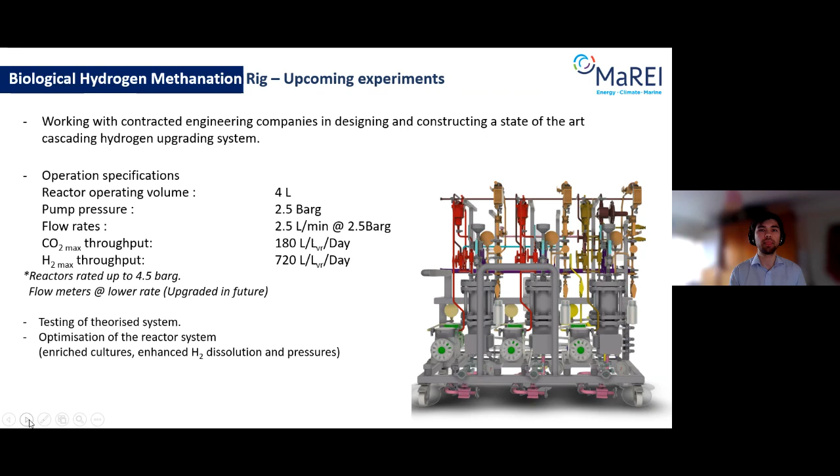Previous research done by a colleague of mine, Markus Voelklein, in early 2019 simulated a 3-reactor cascading system, which was capable of producing grid-quality biomethane from a hydrogen and CO2 mixture. Our methanation rig, inspired by this research, seeks to first and foremost test the hypothesized system.

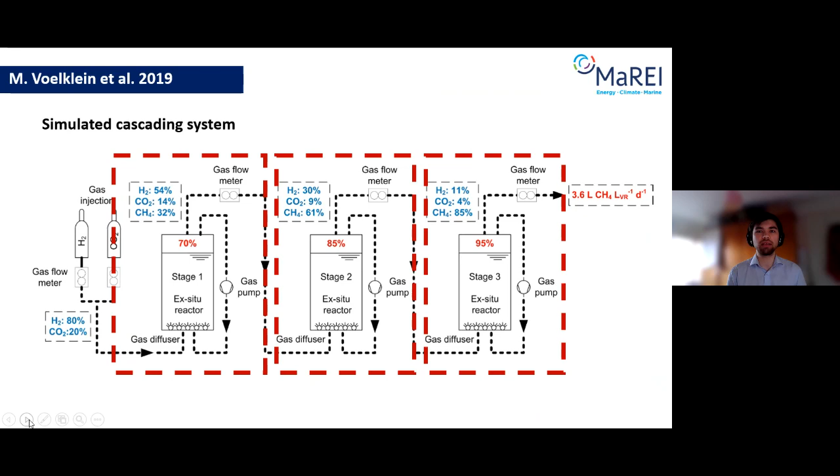So we come to the end of this session, and we would have time for some Q&A. Just to start our Q&A, could I ask Shane, because I saw a lot of people missed your presentation because of some connection errors. Could you please give a very brief overview of your presentation? Just to open the floor for the Q&A session. Shane, is it possible for you? Yeah, it's possible. If you wouldn't mind just giving me back control as well, I'll very quickly flick through slides just to better highlight and answer questions a bit quicker. So Shane, I'd say you could give it 3 or 4 minutes because we're not behind time. That's perfect. If you concentrate on the electrolysis and the hybrid model, it would be helpful. Cool.

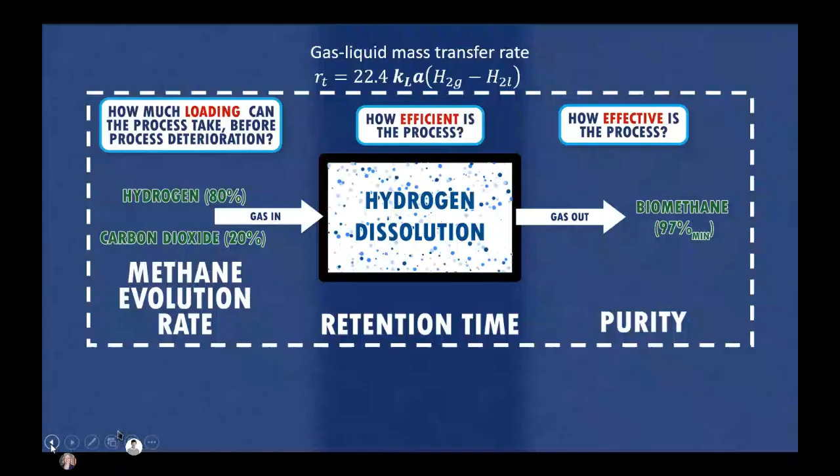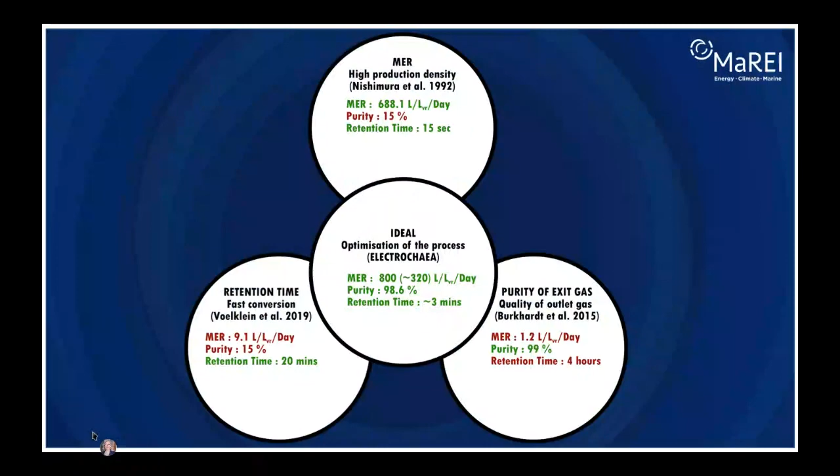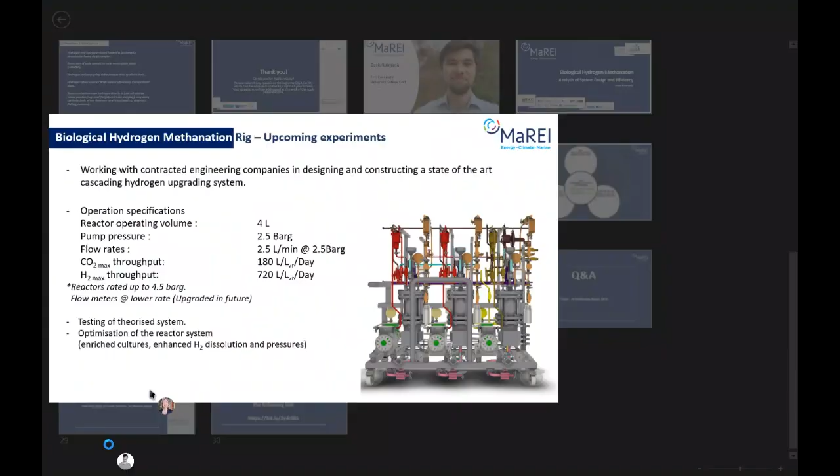So I'm just trying to get slides back up here now. Right here. It might be easier, Tara, if I just click this. What happened was there was an offset between my cursor and the actual thing on screen. Yeah. No, now it seems to have gone again. Hold on. If whoever's in control can just hit allow on that, and I'll try. There we go. Yeah. Thank you, Tara. There we go.

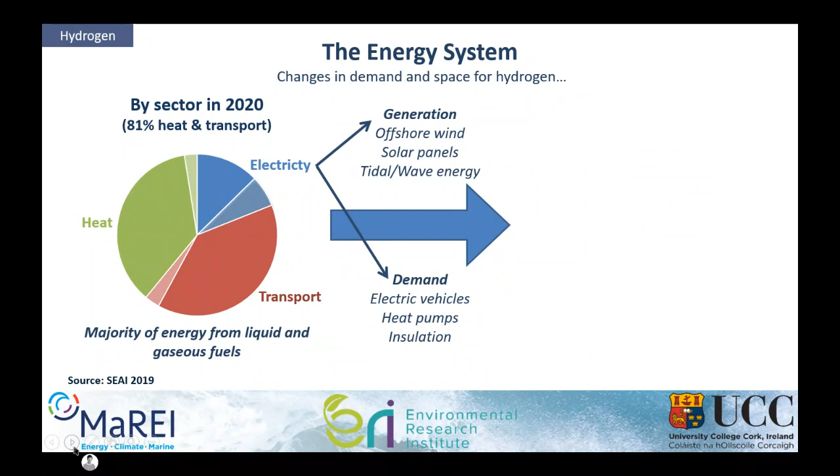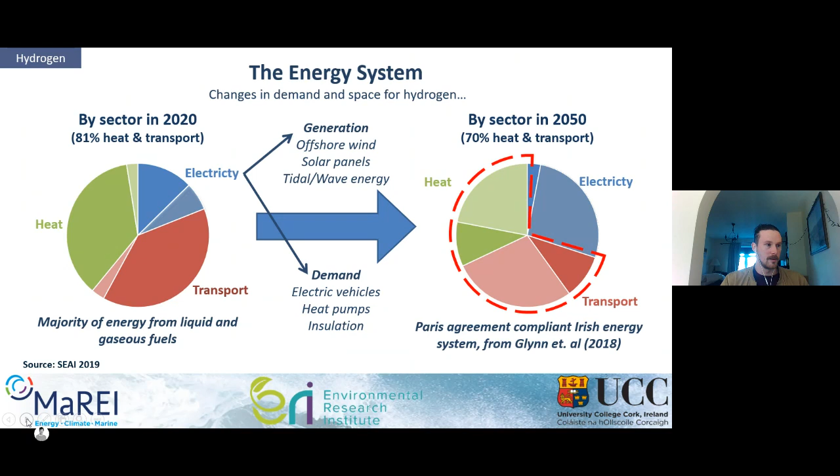Great. So very quickly, this slide is just to demonstrate that most of our advancements have been in the area of renewable electricity. But even in a Paris compliant energy system in 2050, the vast majority of our energy is met through gaseous and liquid fuels, the red area here representing the proportion which needs to be renewable. So there's a huge proven demand for renewable liquid and gaseous fuels in the future, far beyond what we have the ability to produce indigenously. So supplementing this with hydrogen is an option that needs to be investigated.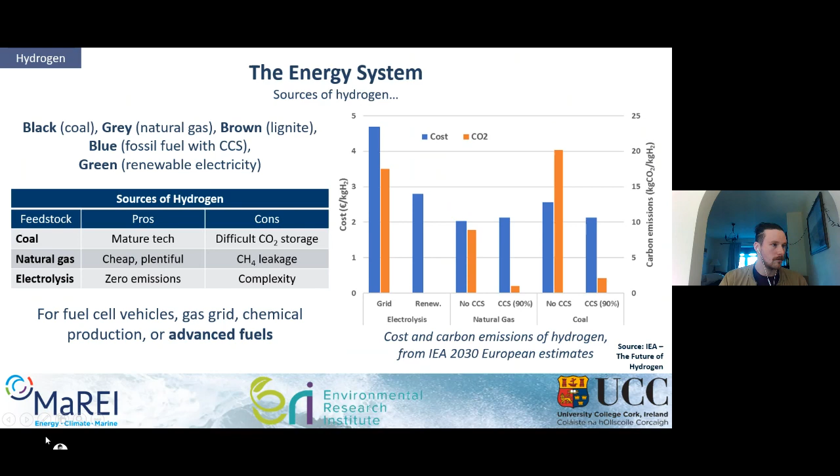So the three options we have in the future, if we build large amounts of offshore wind, are number one, to sell all the power to the grid. It's the lowest cost, highest profit solution and is the benchmark for investor attractiveness. Number two is convert all the power to hydrogen. And what we find is that in order for an investor to choose this option, the costs associated with hydrogen production would need to fall by roughly 30%. So that would mean selling your hydrogen at €4 per kilogram would give an equal profit to selling all your power as electricity. And then finally, we look at hybrid systems.

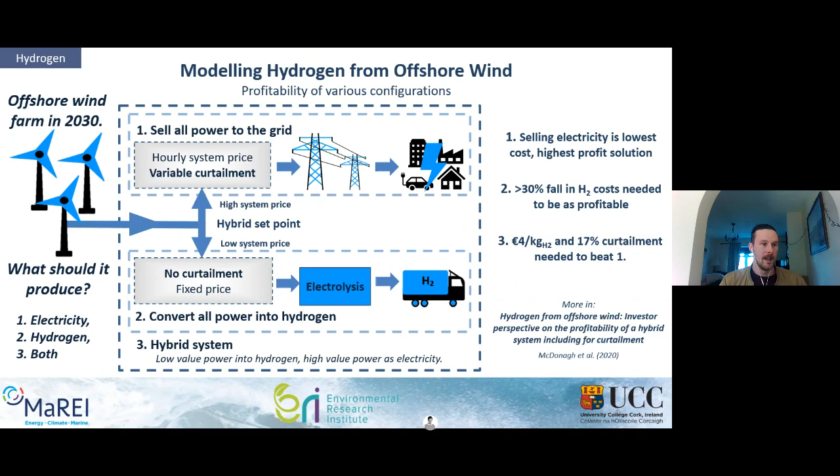So a hybrid system aims to maximize profits by selling low value electricity as hydrogen and high value electricity as electricity on the grid, playing both markets off one another to try and maximize profits. But what we find is the additional cost and complexity of installing hydrogen means that a minimum of €4 per kilogram for hydrogen, the equivalent of €1 per litre of diesel, and roughly 17% curtailment need to be anticipated. So a hybrid system, or even a system that converts to hydrogen, is best suited to wind farms that anticipate high levels of curtailment or have issues with grid capacity and constraint. So curtailment alone will not be enough to drive investment, but if your wind farm anticipates high levels of curtailment, it boosts the argument for hydrogen production.

Focusing just on this for a small bit, this further highlights why curtailment alone is not enough to drive investment. What we see here is our black line, our levelized cost of hydrogen for offshore wind, which is about 3.77. If we assume a selling price of hydrogen of €4, in order for a system that produces just hydrogen to provide an equal profit to the offshore wind farm selling electricity alone, you can see the lines cross here.

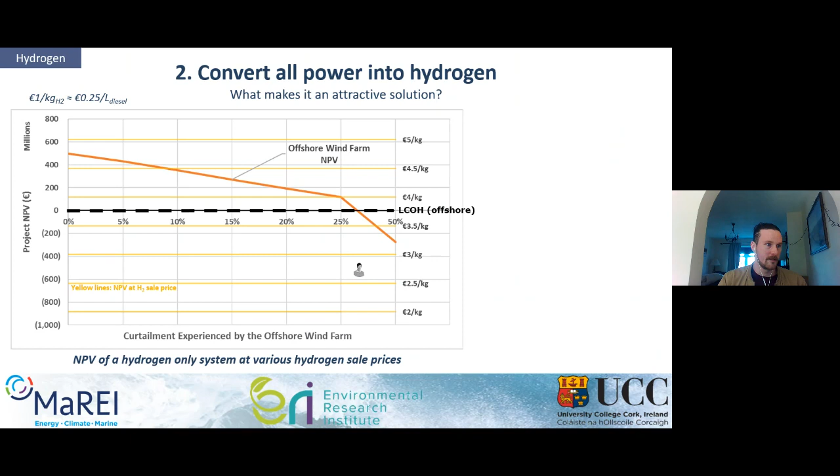So an offshore wind farm experiencing 25% curtailment is as profitable as a hydrogen system selling at €4. And obviously 25% curtailment is very, very significant, and the likelihood is that the farm would not be built if the developer expected that in the first place. We can see then, compared to the levelized costs of hydrogen from onshore wind and from natural gas, it's difficult to compete. And so the business model needs to change in order for this to become more attractive to investors.

In terms of competing with electricity alone, we see that a sale price of roughly €4.50 per kilogram is required if the wind farm anticipates perhaps less than 10% curtailment. So the highlight here is that curtailment alone is not enough to drive investment in power to gas, and that the net present value is also an important thing to keep an eye on.

And when we focus on a hybrid system, we look at selling our hydrogen into higher value markets to help minimize lost revenue due to low electricity prices, more so than try and increase profits. So again, hydrogen helps us to minimize the amount of money we don't make because of fluctuations in the electricity market, more so than increase our profitability.

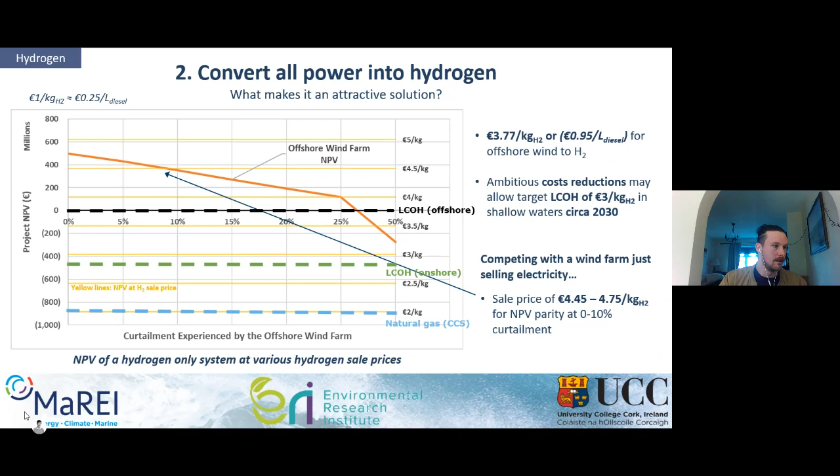And so just a couple points to summarize there. The most important, I think, would be that electricity is more profitable than hydrogen. So we need to think of things like selling grid services, perhaps acting as storage mechanisms, and monetizing the system benefits, which are key to the hybrid system profitability.

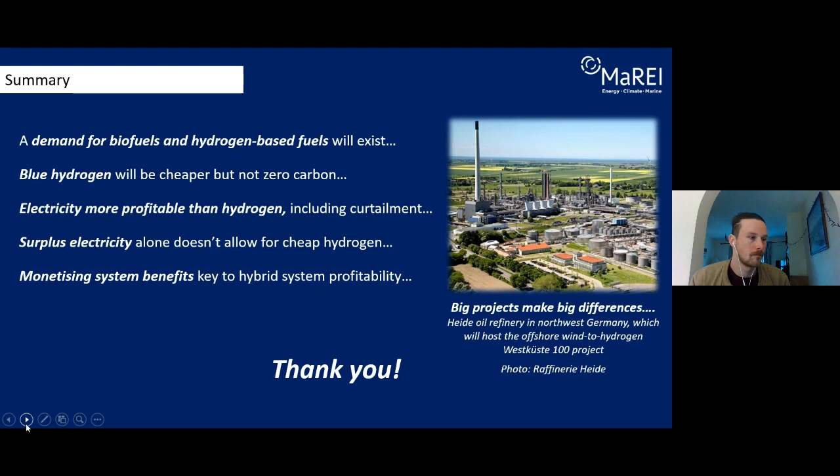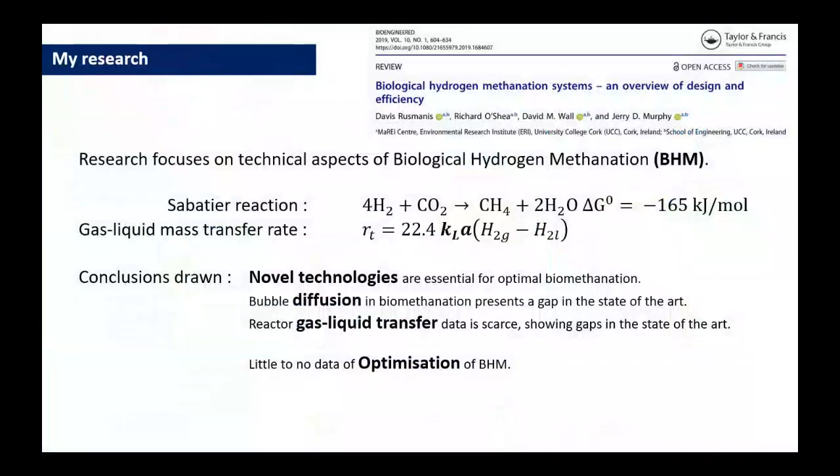We should expect a few questions now for all the presenters with hydrogen that we have here. One of the major questions about hydrogen is the implementation. There is a lot of research going on, but maybe it's an open question for any of you: what do you think about the implementation of hydrogen in future, and when do you expect hydrogen to be a major player? If any one of you would like to answer, Nathan, Shane, or Davis. I can jump in. If I can just rephrase the question, you're asking when will hydrogen become a major player in the energy system? Yeah.

Hydrogen, similar to all other renewable energy, is going to be dependent on incentives for quite a while, and we currently don't see those incentives. One of the things I try to highlight in my work is that curtailment alone is not enough to drive investment in hydrogen. And so we need to look at things like flexible demand markets. So perhaps if the electricity system was reconfigured such that we can incentivize flexible demand in a similar way we incentivize flexible generation, then hydrogen becomes part of the mix.

But until, number one, the electricity market is rejigged in such a way that electrolytic hydrogen can compete in more than one market, and until such a time that carbon capture and storage at scale becomes proven, it's difficult to see hydrogen making inroads. So to summarize, we need to figure out legacy issues around CO2 storage at scale, and we need to incentivize flexible demand in the electricity market in order to make room for hydrogen.